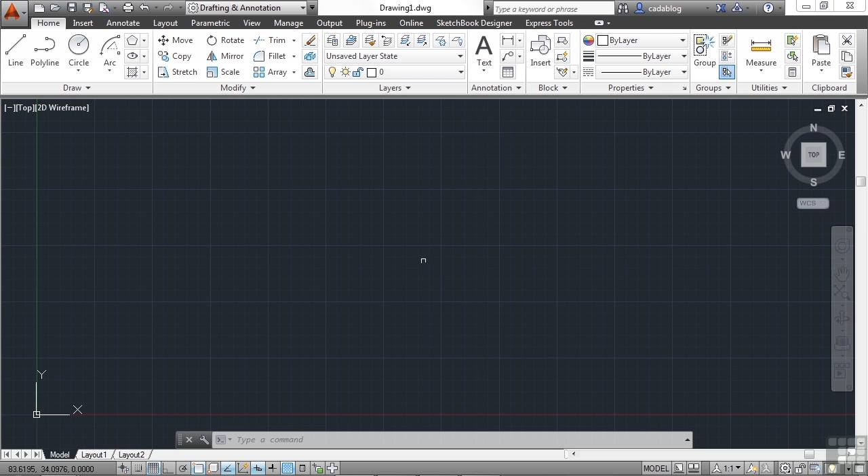The offset command is one of the most useful commands in AutoCAD. It creates a new concentric circle, a new parallel line, or a new parallel curve. You can offset an object at a specified distance or through to a specific point. Let's try these out. Start off by opening up the offset examples file.

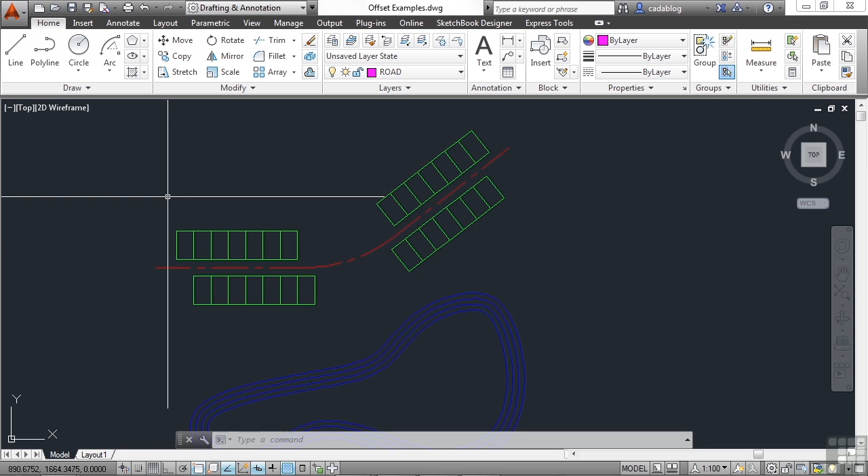Now here we have some basic and very simple contour lines, each of them parallel to each other. Here we have the center line of a road with some simple rectangular shaped lots. We can use the offset command to add new contour lines to our pond. Start the offset command. You do that by typing in the word offset, O-F-F-S-E-T, or just enter in the letter O.

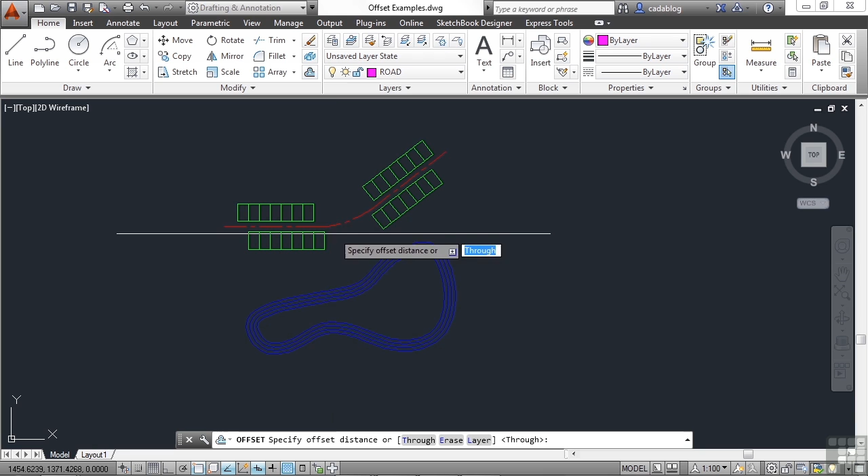Now on the ribbon, the offset command is found up here in the Modify panel. It has its own special button that's right here in the bottom right. Start the command, and you have to give a distance. This will be the distance from the selected object or the original object to the new object that we're going to create. Let's type in 20 units.

Press Enter. This means that the command is going to create a parallel line that's 20 units away from the original source line. Now select an object to offset. We'll go with the inside line. AutoCAD will automatically generate a preview of where the new line is going to go. If it's satisfactory, just left-click, and your new line is created.

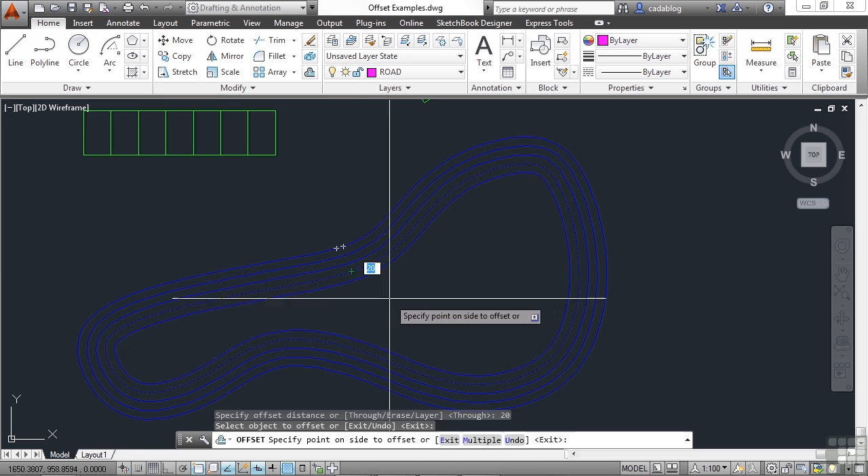Now you can see here, these two lines are equally distant from each other all the way around its contour. They're parallel. The offset command is typically still active whenever you go and use it. So let's start it up again. We'll go with 20 units again. Press Enter, select the inside line, and there you go. Now we're still in it. We can pick our line again, or a new line, and start to offset.

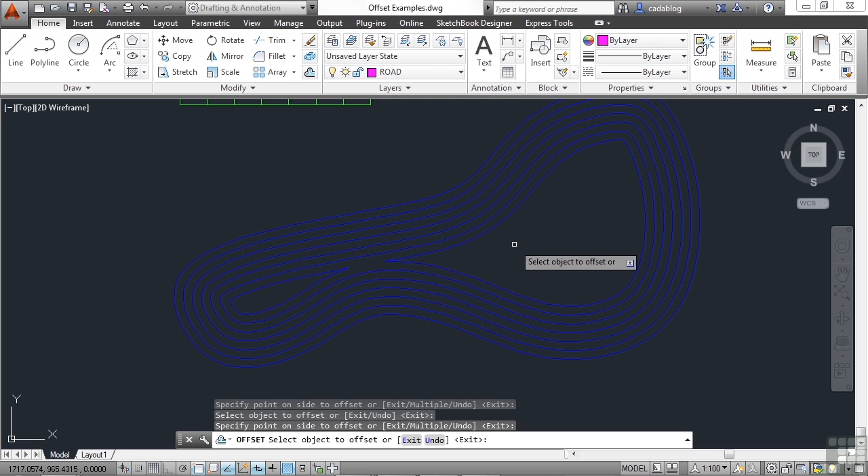Now you can see here, it created two different closed polylines. That's because the distance between this first line and where it comes in again is smaller than our offset distance. It couldn't create the line, so it creates closed areas where appropriate. But that's okay, because that's what we would want to do in this case.

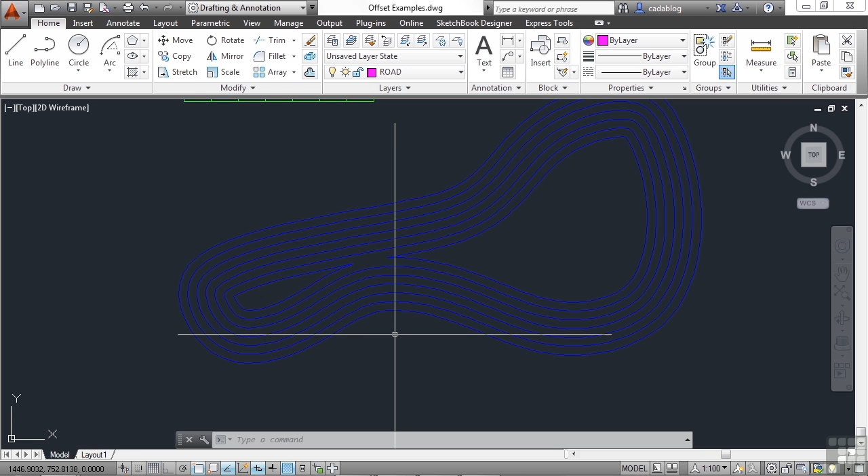Now maybe you don't want to offset by a specific distance, but maybe you want the new line to pass through a specific point. So start the offset command again, and instead of entering in a distance, type in the letter T, as you can see here, is for the word through, because we're going to select an object and offset it through another point.

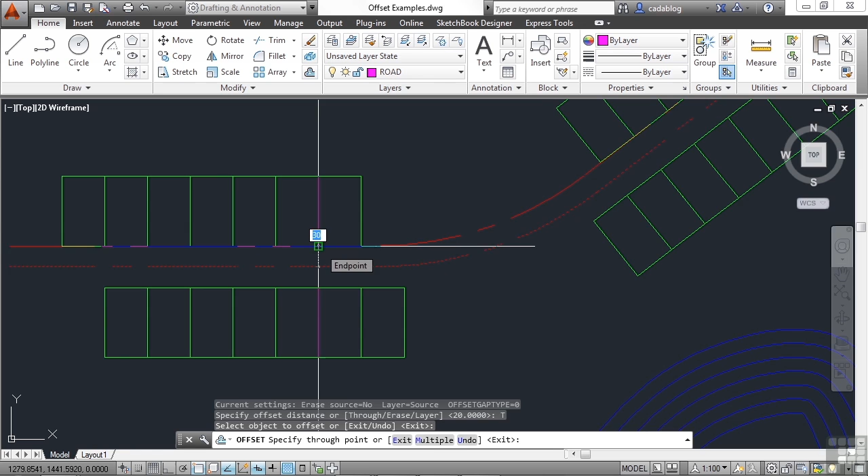So let's go up to our center line, pick it, and now pick the edge of one of these lots. You can snap to it with an endpoint. And this puts our new line parallel to the original line, but travels through our specific point. We can do that again on the other side of the road. And there you go, you very quickly created the center line of your road with your two right-of-ways.

Now let's do something really fancy. Say you want to offset the line to a different layer. A layer gives an object its characteristics, and it groups similar objects together, especially objects that need to look the same or similar to each other. We want this edge of our road to be on the road layer, not the center. So let's activate the road layer by clicking up here in this box in the layer panel. Click the black arrow and select road.

Now, road was already set as being active in the file, but in case a change had been made, that's how you would do it. Now, any new object that we draw, for example, a line, will be drawn on the road layer. It's a solid continuous line that's magenta in color. So let's use the offset command again. Press Enter and hit the letter L, or click on the word layer here in the command line.

And now we have two options, current or source. Current will draw the new object on our current layer. Source will draw the object on the same layer as the source object you selected, just like it did here with our center line. It kept it on the center line, but that's not what we want to do. We want to create a parallel line to our center line of our road, but we want it to be drawn on the road layer. Pick the current option. And now we're going to do things the exact same way.

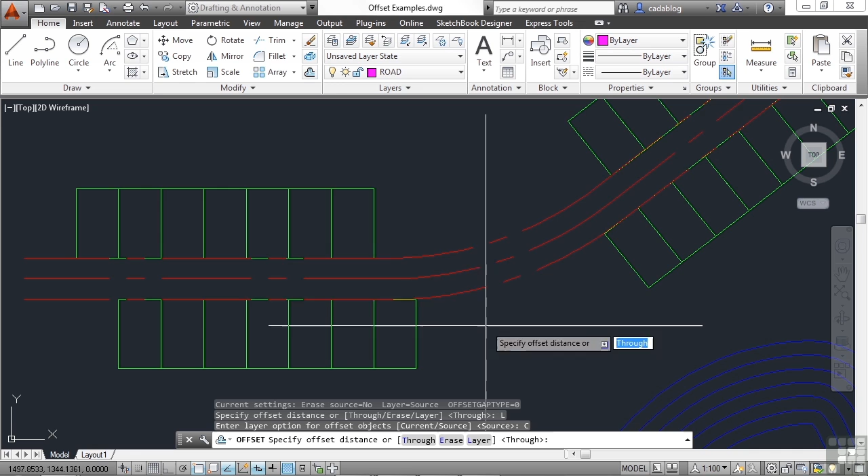Enter in a distance of 12. Press Enter. And now pick the center line of the road again and offset it. Now we've drawn a road that has 2 lines. Each lane designated by those lines is 12 units in width. So our road is 24 units wide.